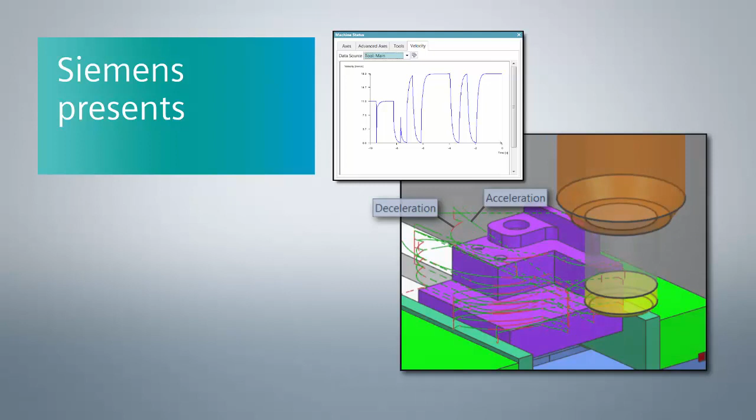You can now chart tool velocity changes, taking into account machine tool inertia when using machine code-based simulation. Taking machine tool inertia into account results in a more realistic velocity curve showing smoother acceleration and deceleration.

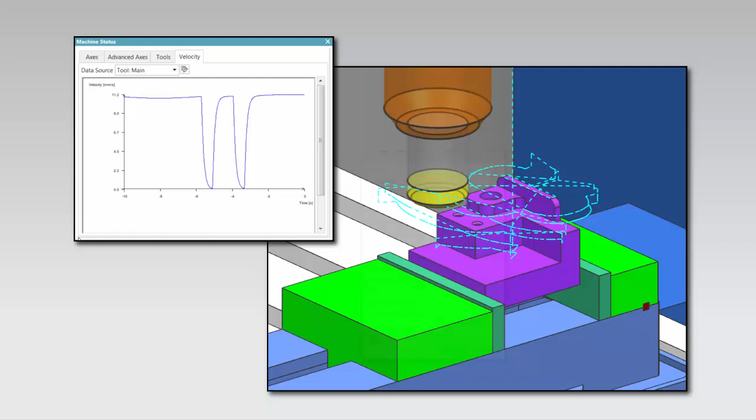This behavior is dependent on the specified kV factor for each axis, that is, the dynamic property that determines the relationship between the machine tool velocity and the following error during positioning. It indicates the velocity with which a given position error is reduced to zero.

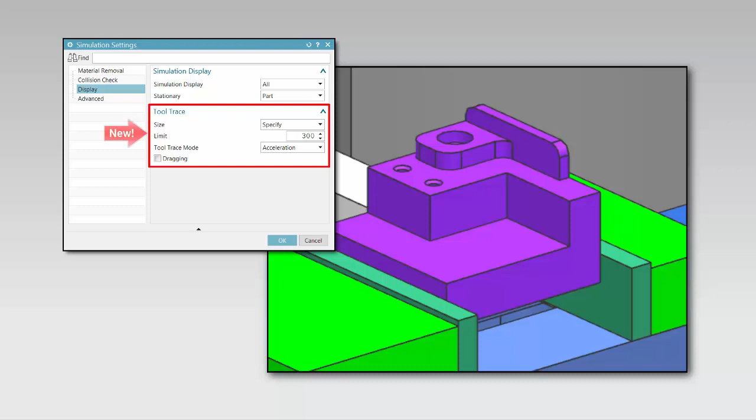The tool trace options under simulation settings are new. Size determines how much of the tool trace is displayed during simulation. Tool trace mode determines the coloring scheme for the tool trace. These schemes can be based on motion type, acceleration, or velocity.

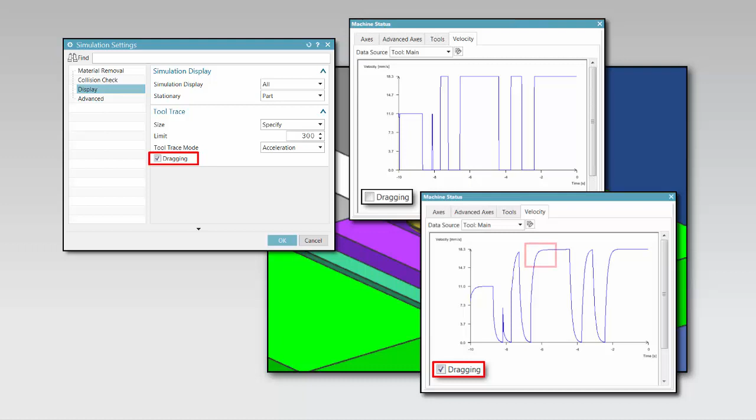Dragging charts the velocity taking into account the influence of machine tool inertia when accelerating and decelerating, resulting in a smoother, more realistic curve. The axis velocity profiles and tool velocity profiles are new. These options allow you to plot the velocity for a specific axis or for all tool movements.

Channel main plots the tool velocity without taking into account acceleration and deceleration caused by machine tool inertia. As a result, the curve is not smooth, showing sudden jumps where velocity changes occur.

Tool main plots the tool velocity while taking into account acceleration and deceleration caused by machine tool inertia. As a result, the curve is smooth where velocity changes occur. The ability to plot while taking into consideration the machine tool inertia was enabled by turning on the dragging option in the simulation settings dialog.

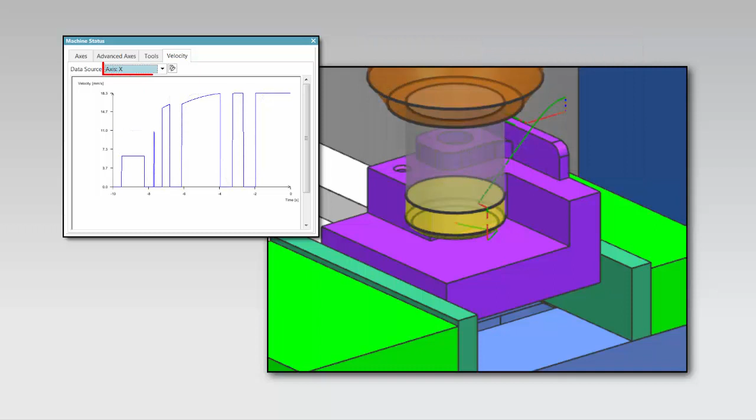You may also plot the velocity for a specified axis. As with tool main, the curve is smooth where velocity changes occur. Show tool trace graphically displays the acceleration, deceleration, and constant velocity traces.

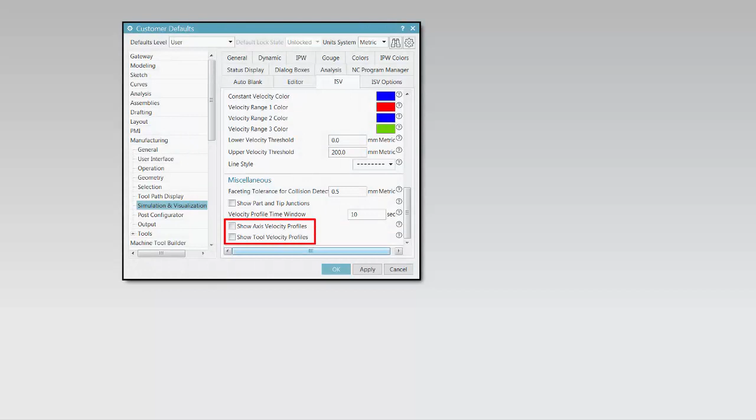Show axis and show tool velocity profiles in customer defaults must be turned on to enable the new tool trace capabilities.